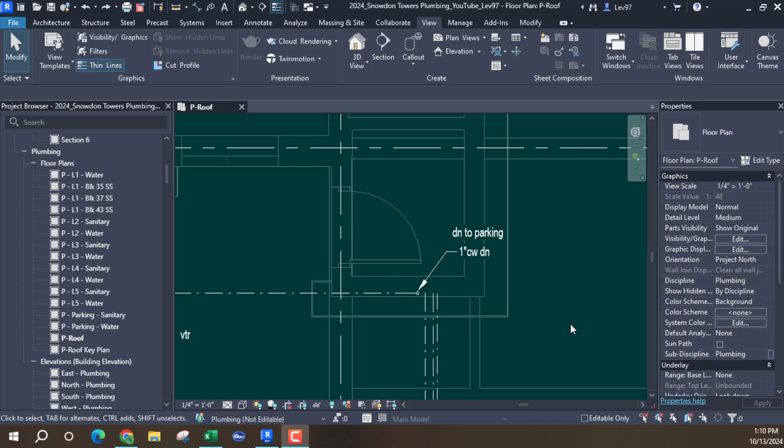Okay, let's continue with this project. And the last part of this project, I was doing the water services.

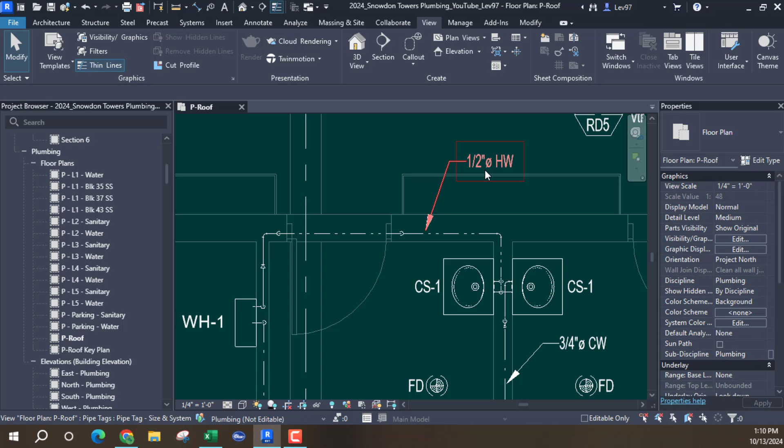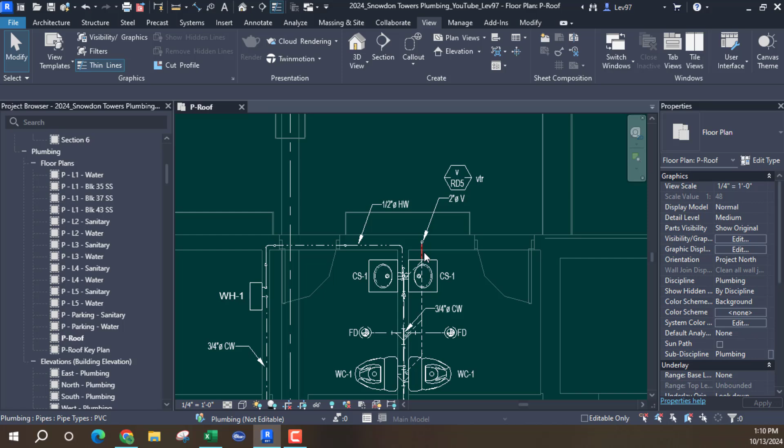So I finished with my hot water going over the door. So I'm going to turn on both systems. Let me go to visibility and filter, because I filtered it out, and turn on my vent system and my sanitary system. As you can see, if I was going to print this out on a PDF, those two systems are being combined.

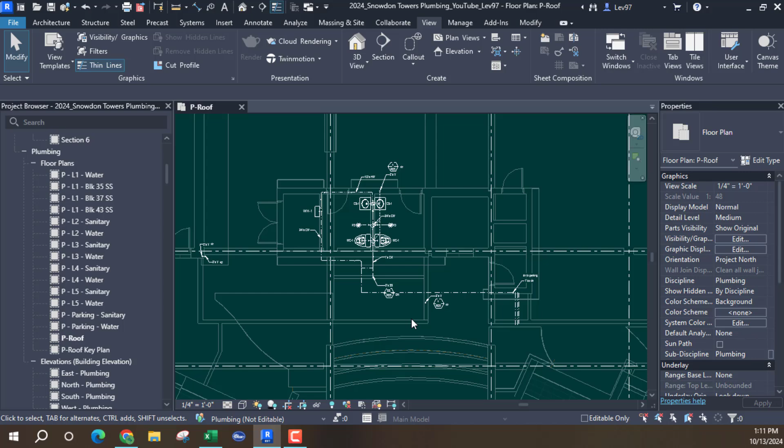And that's not a good idea, because what I've done is separated these through the levels. There's water on level 2, sanitary on level 2, sanitary on level 3, and there's a water plan on level 3 also. So what I'm going to need to do is separate these two systems, the water from the sanitary, because it just doesn't look

readable. In this case, you could read it, you know, if you were looking at it, it's possible to read, but I think it can be more clear if we separate them out.

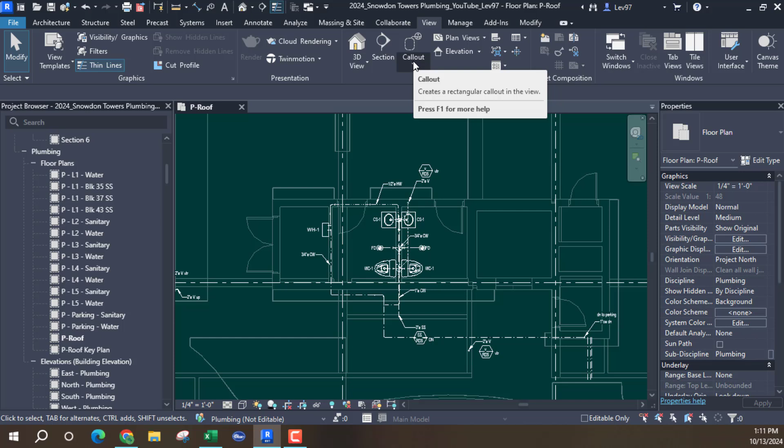And the way to do that is to use what's called a callout. Let's see what it says. A callout creates a rectangular callout in the view. But it does a little more than that - it allows you to filter out information.

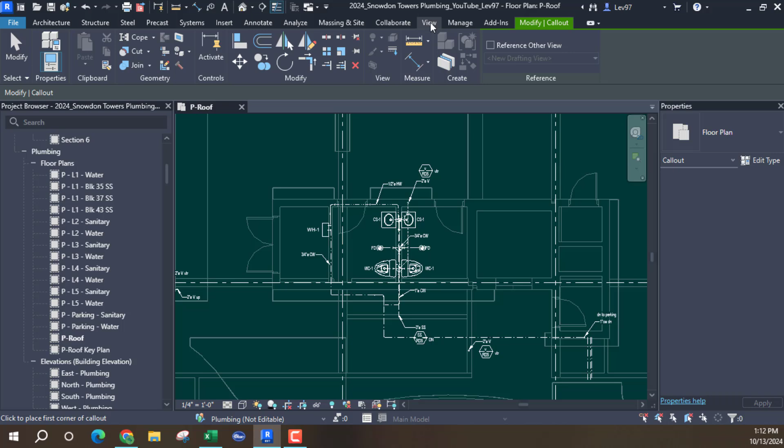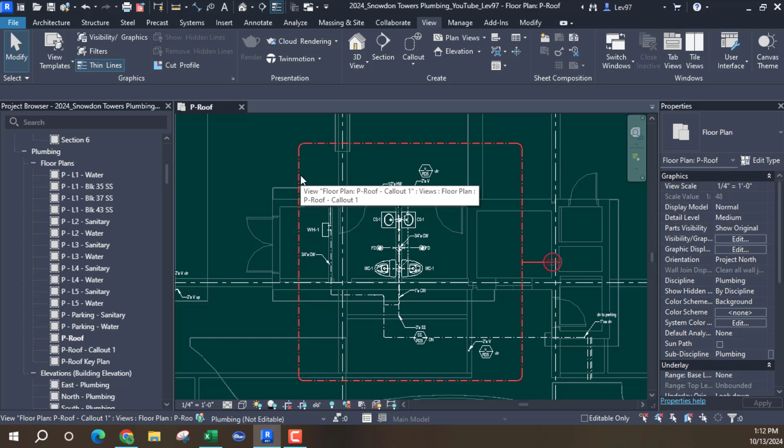So let's see what this says. I'm already in the mode, so let's go here and I'm just going to click. And what it's done is created a callout here. I'm on the roof plan, but it created callout 1. If I hover over this triangle, it's going to say callout 1. So I'm going to go to this roof plan, double click, and it's showing me information.

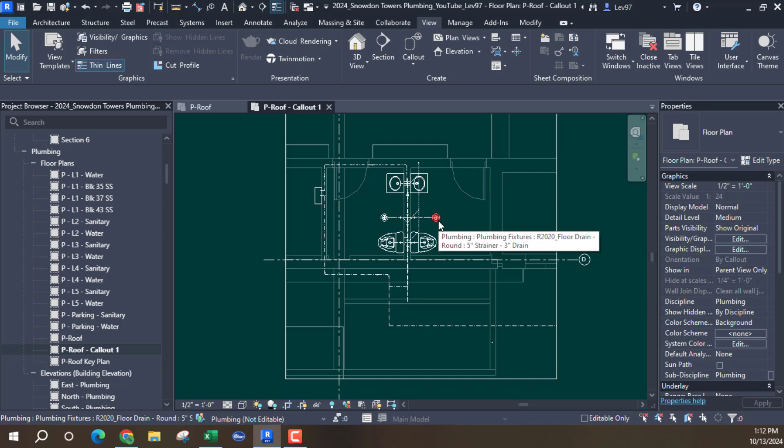Okay, it has the grids, and it has both systems. And you can see that it's giving me a way to separate the two systems.

And the way I can do that, first I think I'll put this on a 1/4 inch scale. What's my roof on? My roof is on a 1/4 inch now. Can I put this on a 1/4 inch? I'm sure I can, because it was just on the half, right? So that's still a 1/4 inch. You see, so now it's independent of my roof plan - it's independent now, so I can do whatever I want to do.

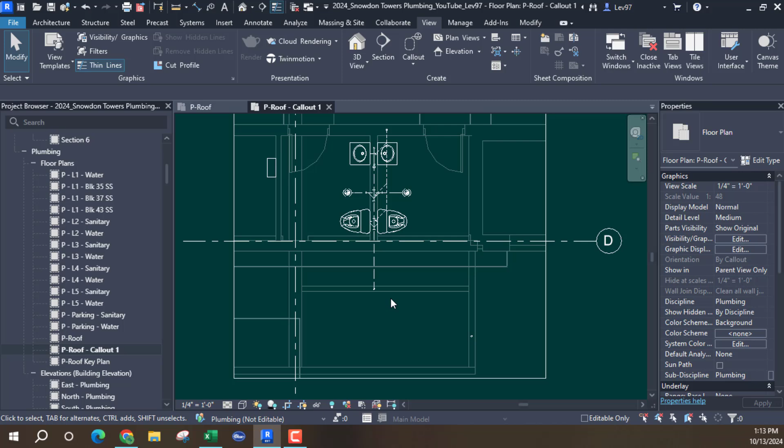I'm going to continue using the 1/4 inch, and I'm going to turn off - it can either be the water, let's see what comes first. I think sanitary is going to come first, so I'll turn off the cold and hot water. And we can say OK. So now this is a sanitary system.

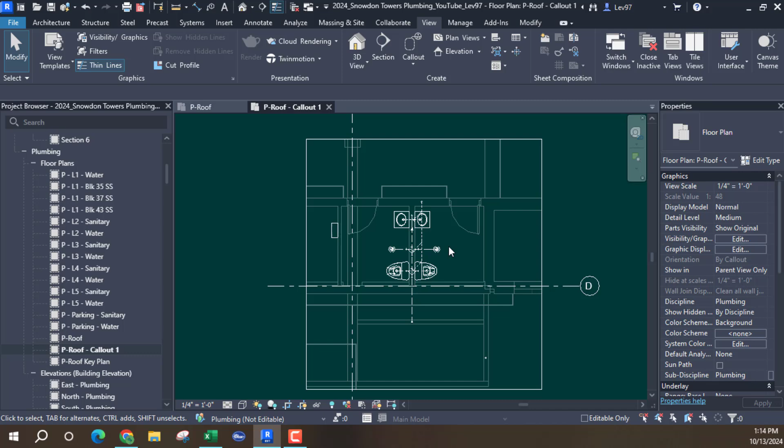So what it's done, what I see, and I think you guys can see it too, is that the text did not transfer over. So let's see. I think that first, P-roof callout, I'm going to rename - let's call it callout sanitary. I'll keep the callout name, or you can do whatever your office standard is, but for my purposes, I'm going to say callout SS.

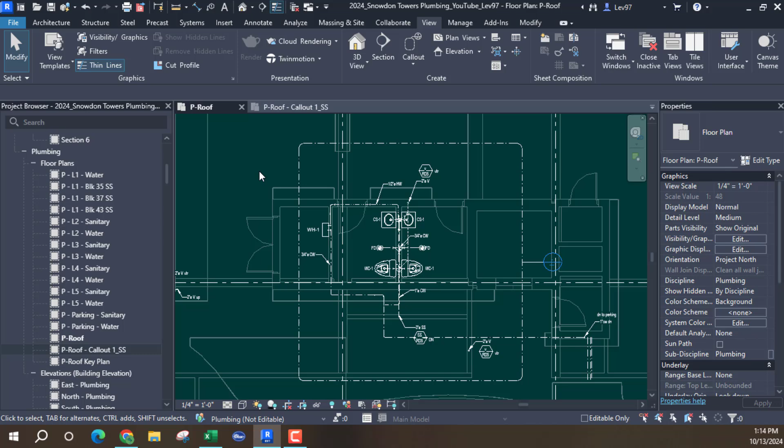Let's go back to the roof plan and do another callout. Let's see, can I copy or duplicate? Okay, I don't think it's going to do that. Let's see. Well, I'm going to do it again. There might be a way to...

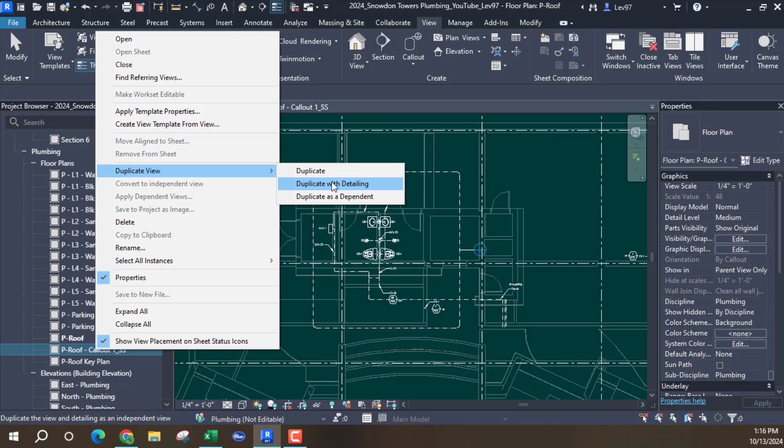Let's do another - let me... So what I'm going to do, let's see, I think let's go here and right click and duplicate view. So if I duplicate view with detailing, will that bring over the text? Nope. But okay, so I can use this.

Let's rename this, and let's call this water. That's a copy - let's call this water.

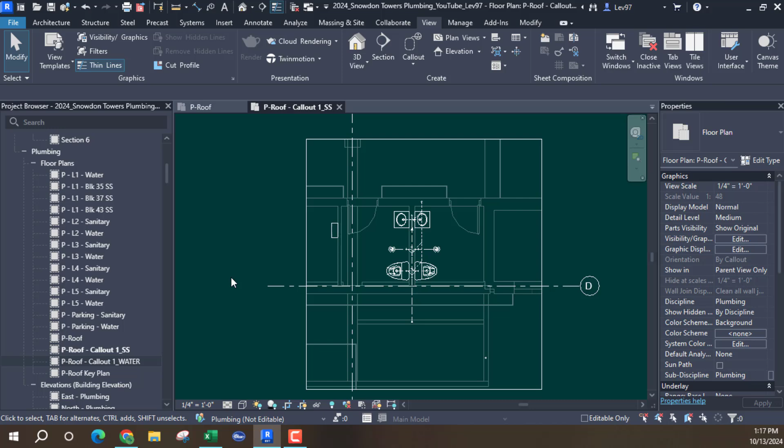Now, if I want to put this on a sheet, okay wait, let's go over and filter out the drainage. So I'm going to turn off the drainage and only show - let's see what happens - if it's a duplicate, then let's see what happens. So this, wait, wait a minute, I did something wrong.

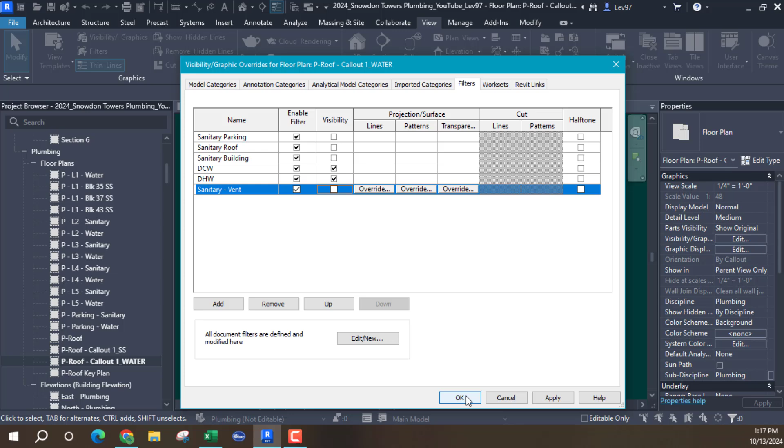Let's go back. Water, this is sanitary, water, here, okay. So let's go here, sanitary. I think that this might work, guys. This might work. Come on. Okay, so if I go back, only what I want to see is just sanitary - I don't want to see hot and cold water, right?

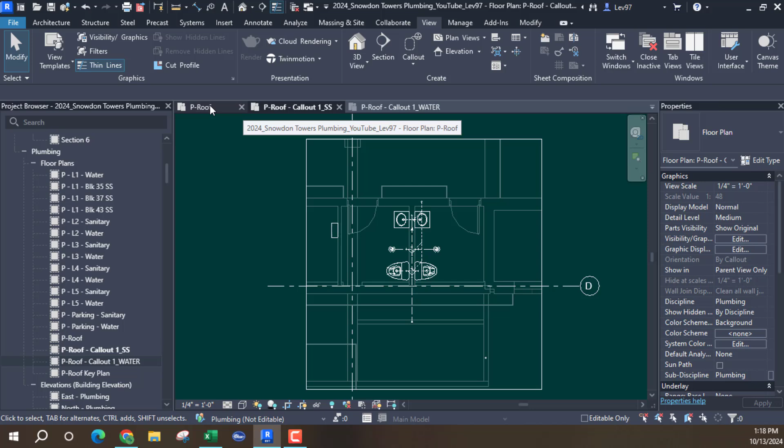So let's see what kind of magic is going to happen. Okay, that's what I want. Now let's go back to the roof, because this is telling me something, so let's go here, because I know what I'm going to do. I'm going to put this on a sheet, okay?

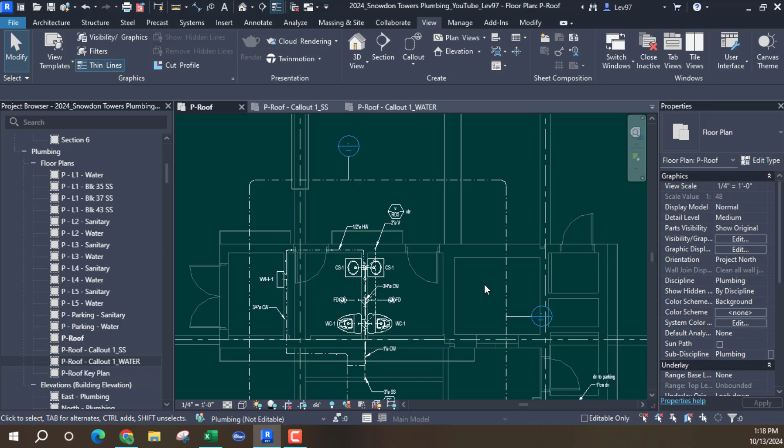Let's see what Revit does. Oh, okay, so there's two of them. You see? There's two of them. They're overlapping, which is good, because it looks like there's only one.

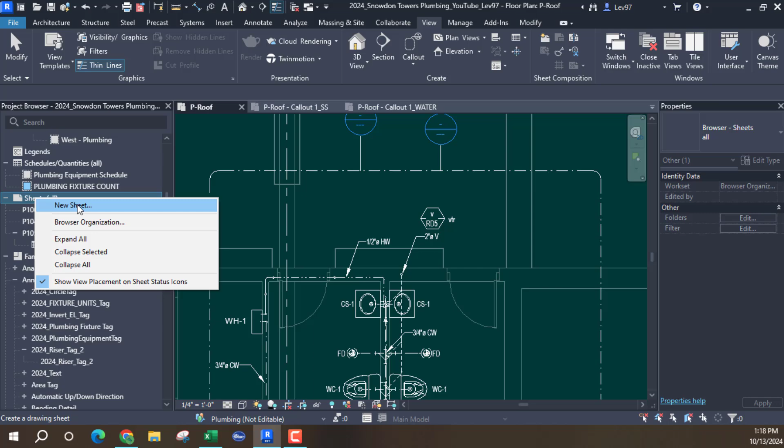So what's going to happen is, let's put these on a sheet. These sheets, level, let's go sheet. I'm going to right click, new sheet, and call it roof. Okay, this is my sheet.

I'm gonna say, okay, yours is gonna look different than mine, but it's the same process, okay? Same process. I'm getting there in a Pinto, and you might get there in a Cadillac, but we're all going to get there at the same place, right? So it's unnamed.

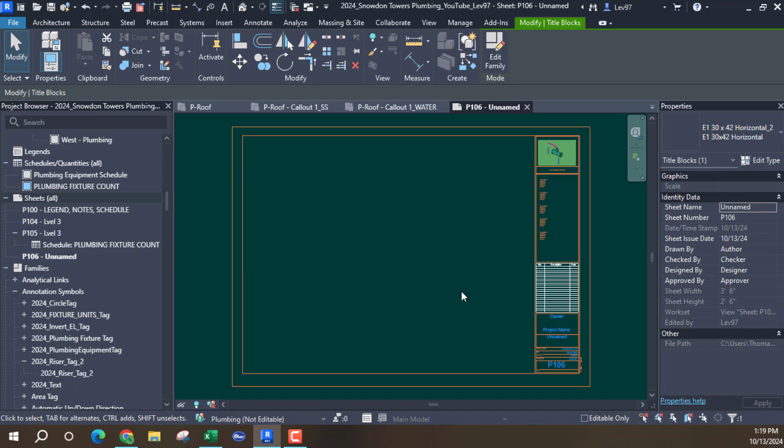Let's click this. Let's click here. I can go down. Sheet name is going to be unnamed. Let's call it roof plan.

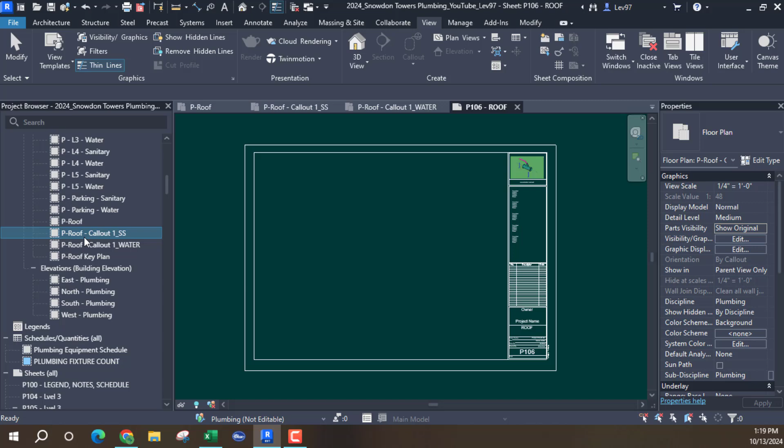And let's go back. Let's go to our callouts. So I'm going to drag both of these guys over. That's sanitary. So you can just drag these over and put them on your sheet. Really nice. Line them up however your office does it.

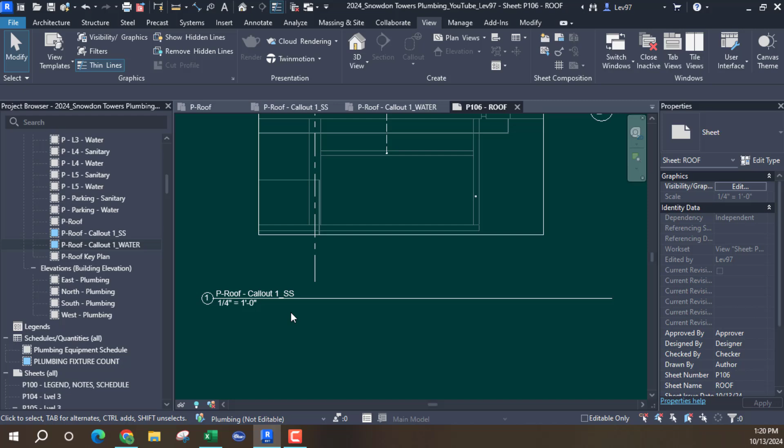Okay, so this is what's going on. That's the scale, that's the title. And this should be 2 over here, and then on our floor plan it should say 1 and 2, right? So you see, Revit is nice, ain't it? Man, how could we live without Revit? That's nice, I like that.

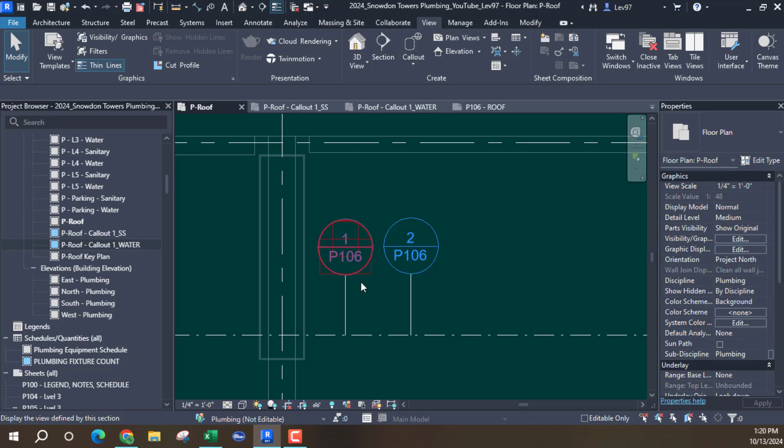The only thing about it is, I wonder if there's a way to manipulate these callouts where the 1 is going to say sanitary and 2 will say water. Somehow there should be a way to edit this family so that it can say water and sanitary. But maybe I can look into that and see if there's a way to do that.

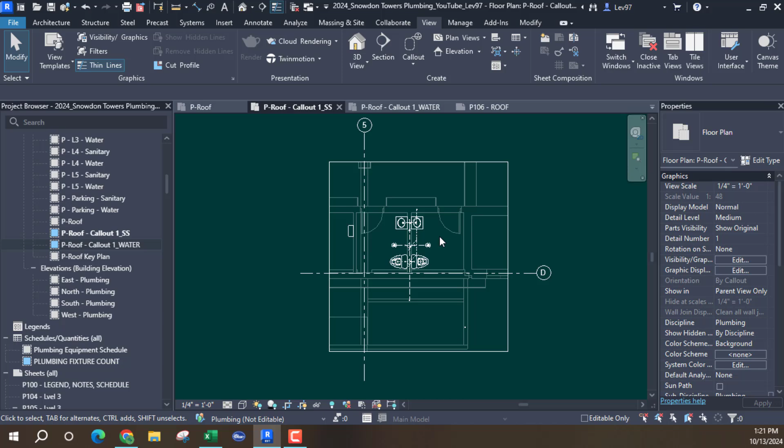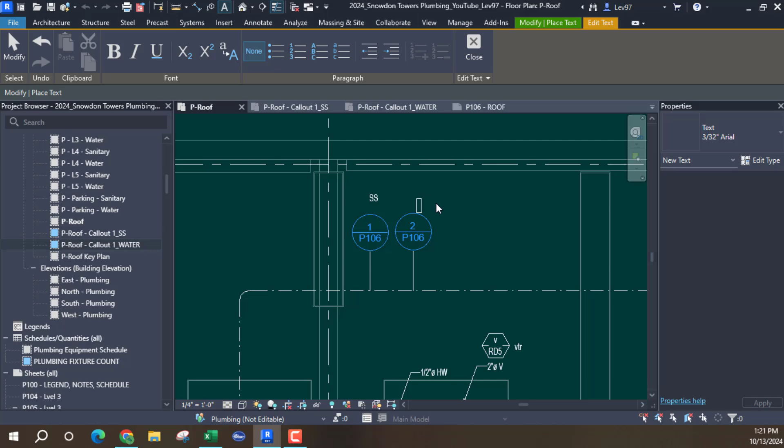Where am I? I'm here. So sanitary, SS. So for now, I think maybe I'll just put a text up and notate text and I'll just say SS here, and it's water. Okay, I know this is what we call dumb text. There's got to be a way to incorporate that into this family.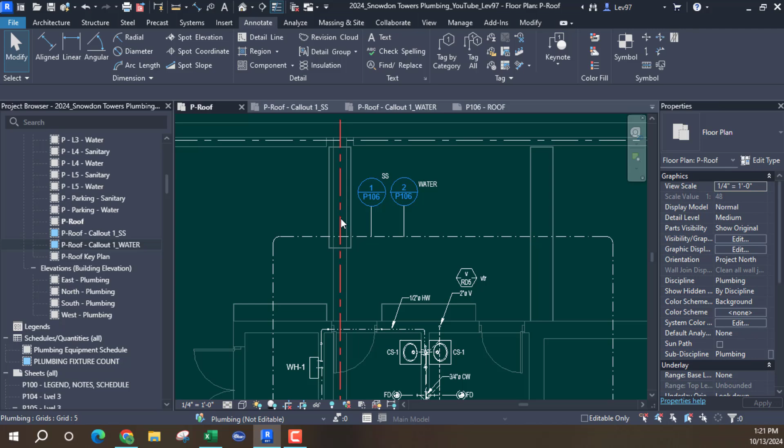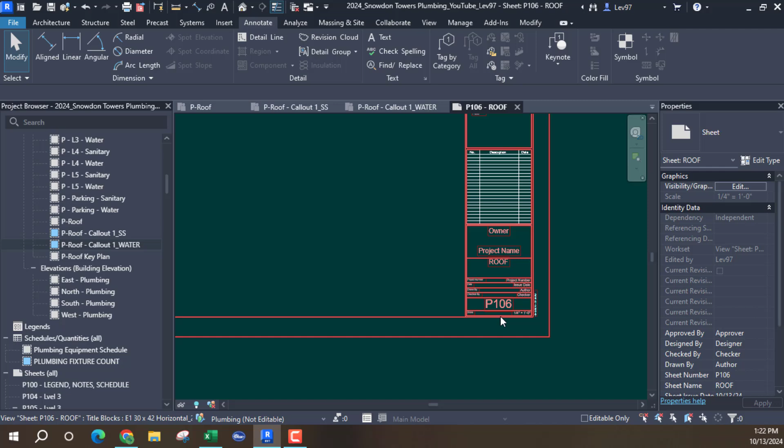So I'm not going to look at that now. What I wanted to do was go over how we can separate these two. Okay, but for now, whoever's reading this drawing, they know that it's the second view on sheet P106. So we go P106, and the number is down here, okay, and it's here.

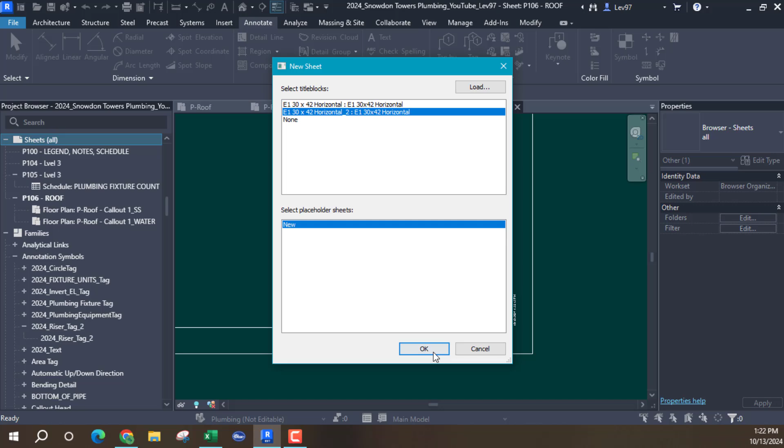I think we can change that, yeah, to whatever. You can change it to whatever, but what Revit does, it looks at the next number, you see. It brings in the next number. So if I right-click on sheets, the next number is going to be 107. Right-click, new sheet, it's going to be 107. Okay, that's just how Revit does it.

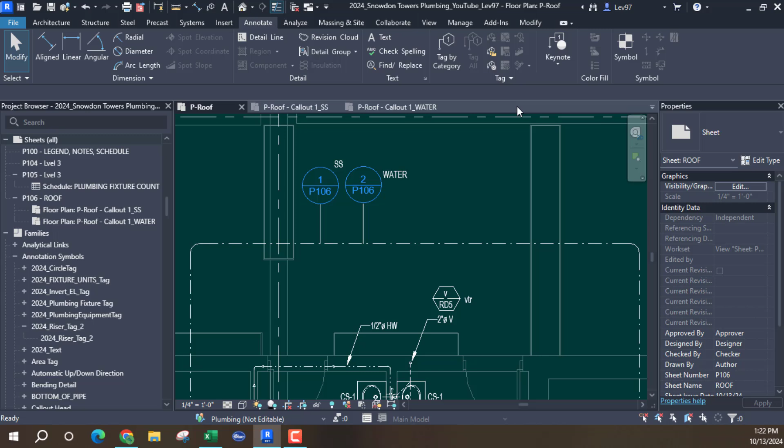So I'm gonna undo that, come back. Let me synchronize this before I do anything else. So I think that I'm gonna close this sheet out. I'm gonna close what I want to go over.

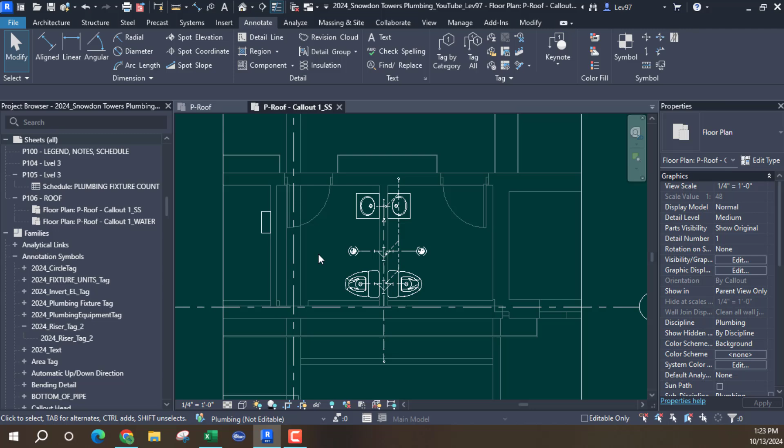I want to bring over my text. So let's close out. I don't like to have too many tabs open. Let's close that out and go to the roof plan. And I'm gonna try something.

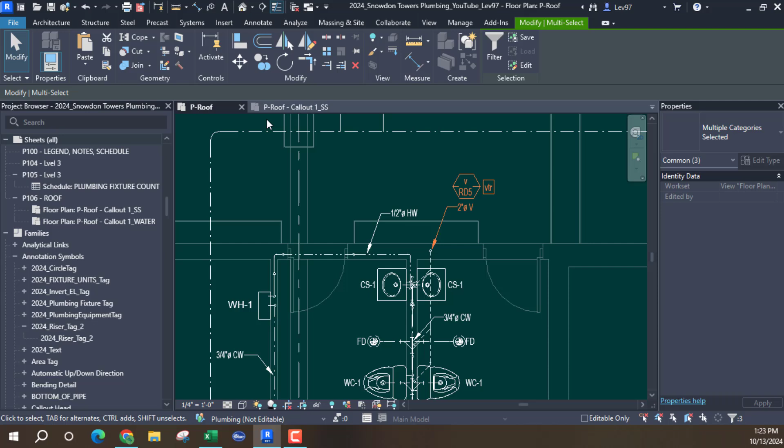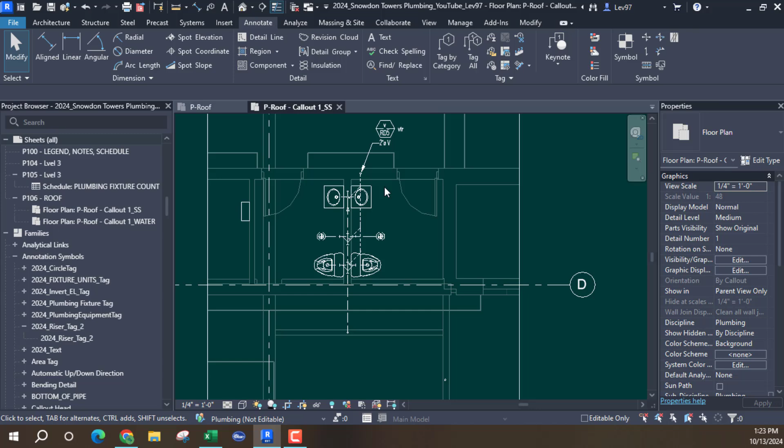Let's go here, and I'm gonna copy this to my clipboard. Copy to clipboard. Go to my callout, SS, and paste. Let's see, paste align to current view. Align to current view. Yes. Man, Revit is just full of surprises today.

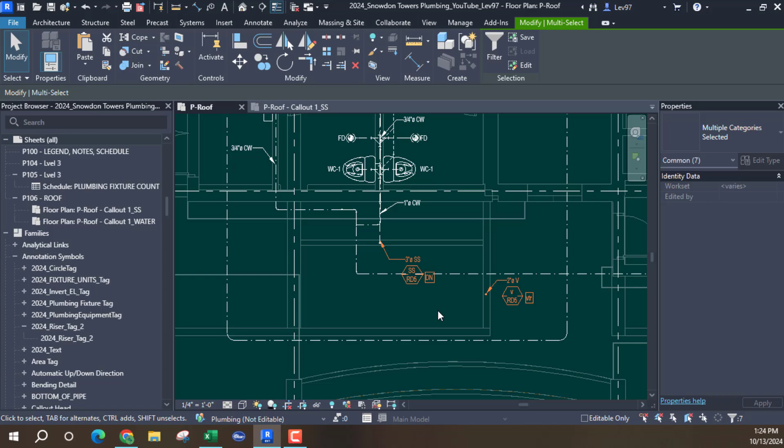Full of surprises. Let's go back, and let's just get a few of these. Man, there's not many. Let's go here, let's get this guy. This one, this one. Did I get that? Is it? Yeah, it's here. Okay, let's go back, I think that's all of the notes.

I mean, there's going to be more notes depending on your office, whatever your project manager wants you to put on. And maybe there's another way of creating your callout as well, along with the notes. Maybe there's a way to do that, but for now, I'm going to use copy and paste.

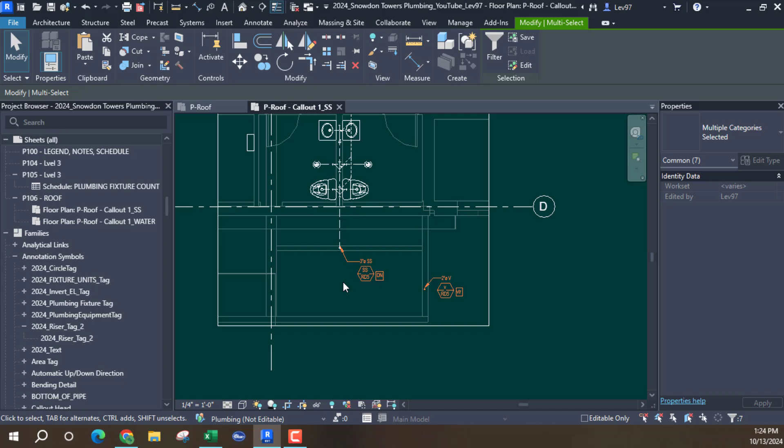Copy and paste to current view. So everything looks good. And you can go back and you can erase these two, or you can erase all of this information, which is usually what happens when you do a call out, right?

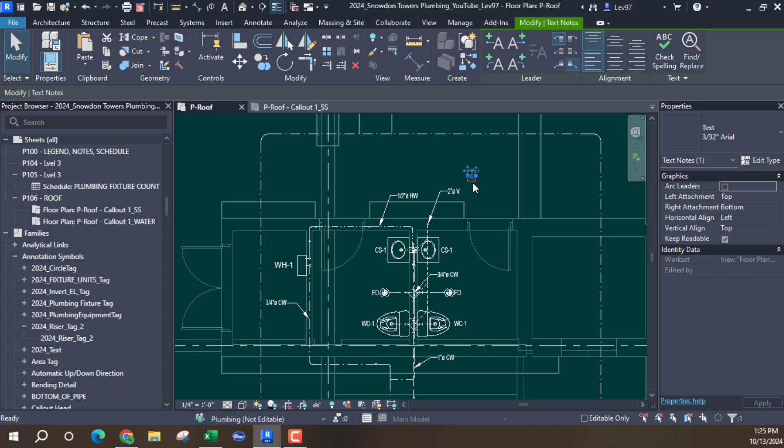You try to make it what we call a skeleton layout, right? So this would be, I would not have this text in here. So it would be more like, I don't want to erase it. I don't know why I'm paranoid about the fact that I just erased these two, these three, these four, these five, these six. You see, so it gets down to, no, let's leave them there.

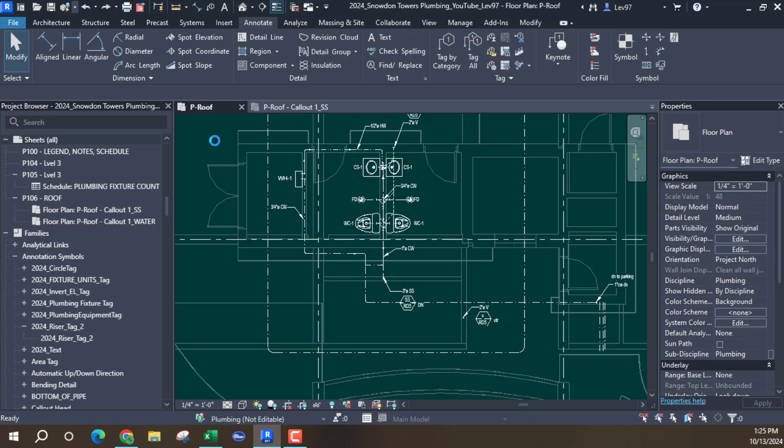I think it's okay, but depending on how your office is, me, I'm a little nervous about erasing those. I'm going to sync again, and I'm nervous for good reason. Okay, so we have that, and here's the second and first views on your sheet.

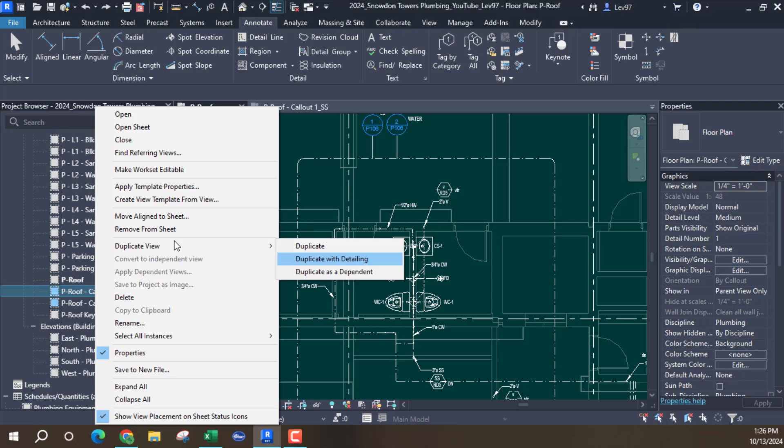This is the call out, which you can see that Revit created two, but you have to go in after you create the first one. You go in and you duplicate. Go here, come over here, duplicate. Okay, I tried duplicating with details, but that didn't work.

I thought duplicating with details would bring over my text. I am surprised that... I'm going to try this again. But just view, call out.

Rectangle, let's do this one. And it's going to be this call out. Double click. Okay, it's this guy. You see the text is not there. Let's go back.

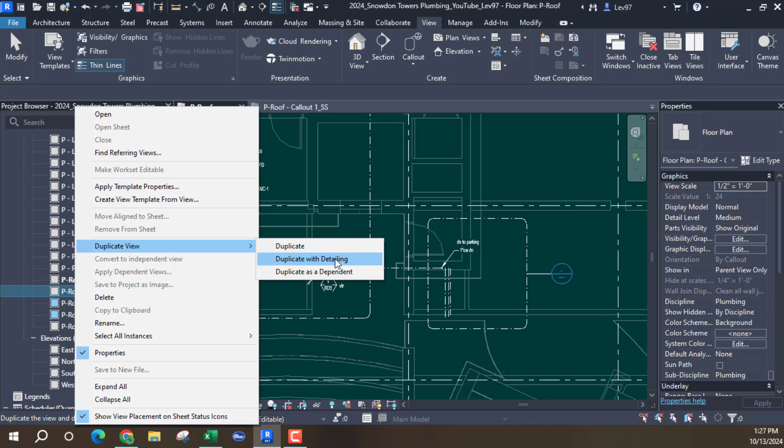I'm going to, but I will be duplicating with detail. Then I could, let's see what happens. Now I can erase the other one. Nope, it's not happening. So, okay, so I'm going to erase this. That was a test to see what's going on. That's fine. And erase, nope. Delete this one, delete that one.

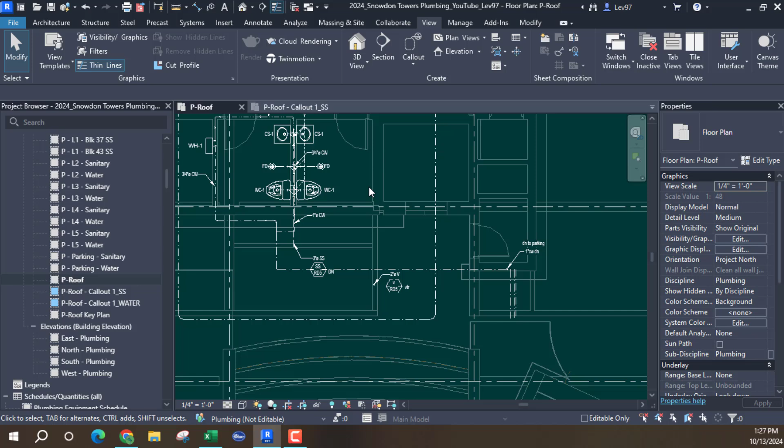Okay, so that's what's going on with the call out. And the reason is because there's two systems just overlapping each other, and it doesn't look pretty, right? It just doesn't look pretty at all.

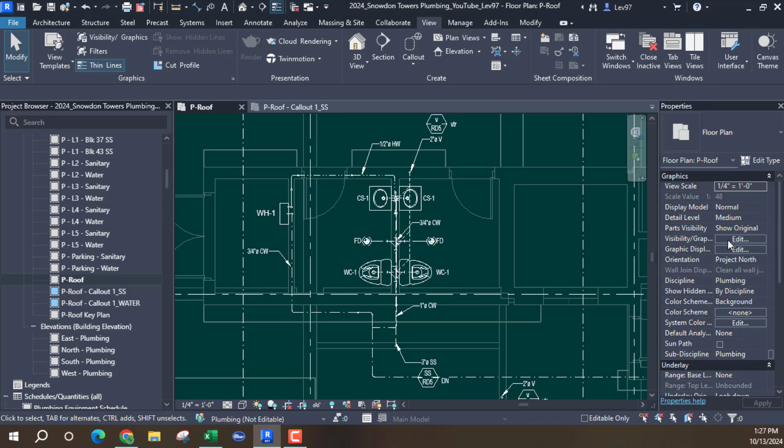So that's the reason, and what we can do is, can we filter? Let's filter. Let's filter, and we can do it like this, we can do it like this, and we can do that. Okay, so we have this.

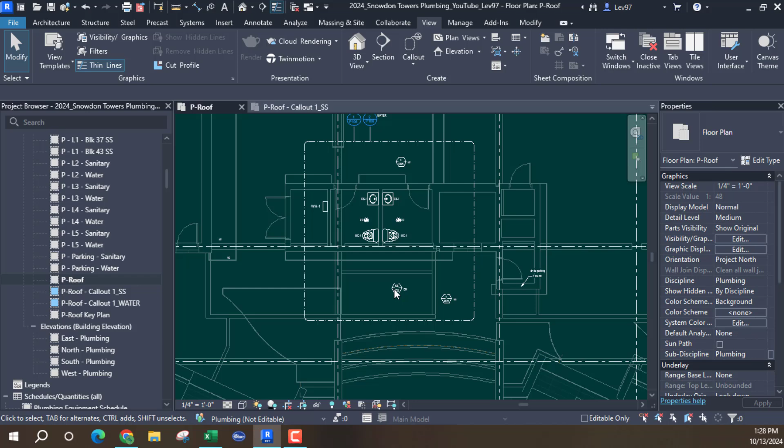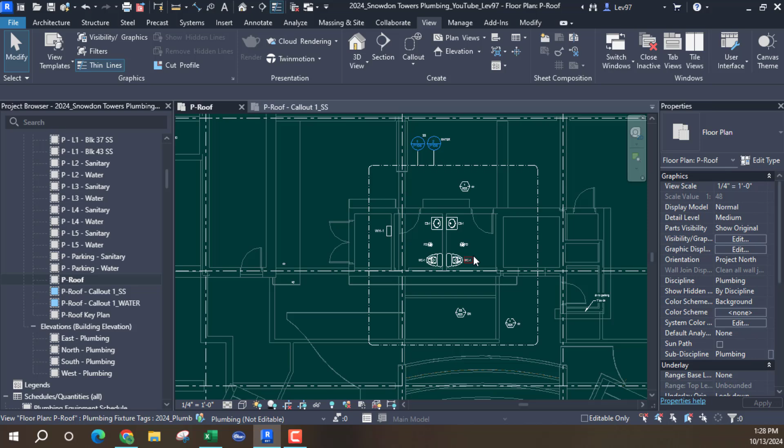And we can take off or delete this text. We can delete this text, and we can use this reference so that someone would know that on the sheet we can see what's going on in this skeleton, right? The skeleton floor plan. So they will click on here, or they can go to the sheet. They can go to the roof plan, and it's here. Okay, so everything is still there, but you don't have a lot of clutter.

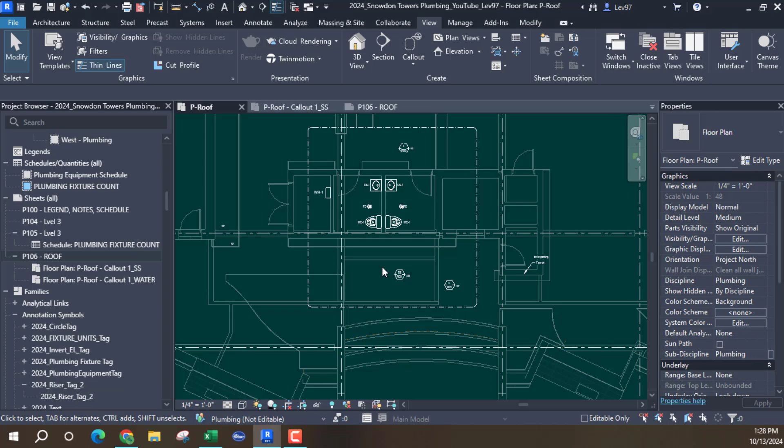And you can tell the contractor or whoever's reading this drawing, your project manager or whoever, can know that this is the reference that they can go to see what's going on within this parameter, or this floor plan.

Okay, all right, I think I'm going to leave it like this, and you can delete your text. I left it there, or what you can do before you even make the text, you can go to each of your systems and create your text within your call out. I think that might be a call out.

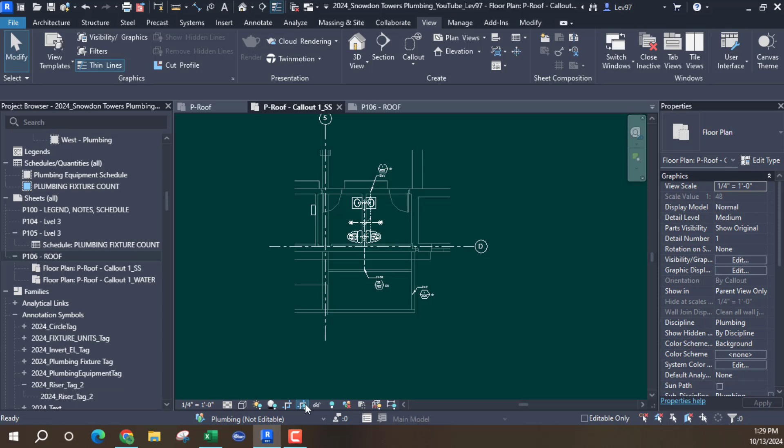What's that? Is that crop view, hide crop region? Okay, so that's what that is. So that's the crop region that was being shown. Okay, so that's what's going on. So it's up to you guys how you want to do it.

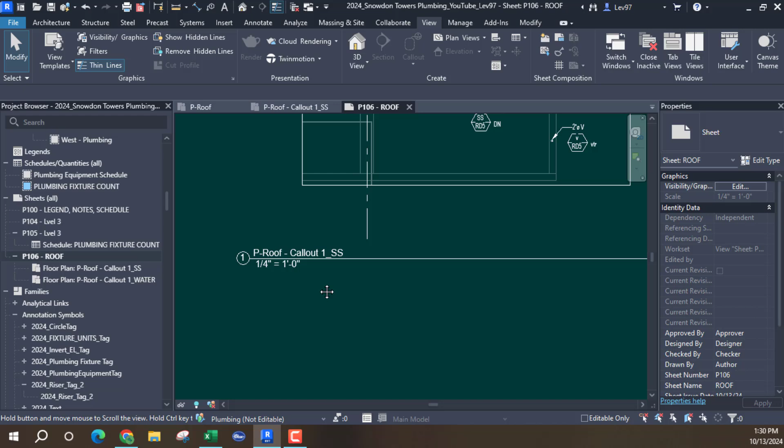I just wanted to point out that once the system starts to overlap, you can always separate your systems using a call out, and from there you can put your call out on a sheet, and you can call it whatever you want to call it. Okay, here's your viewport, and you can edit it however you want to edit.

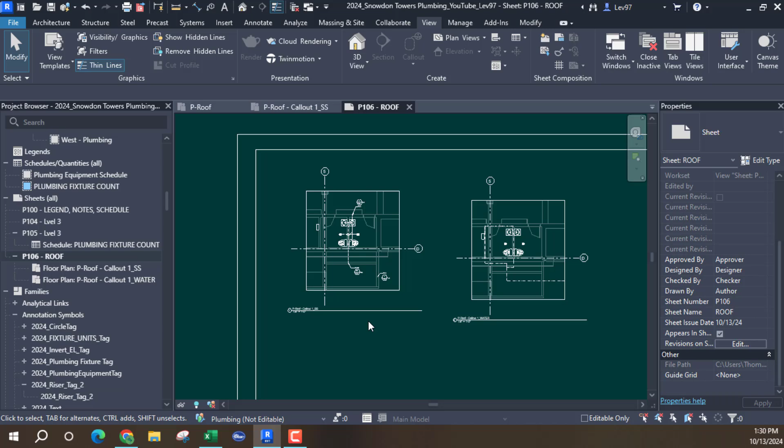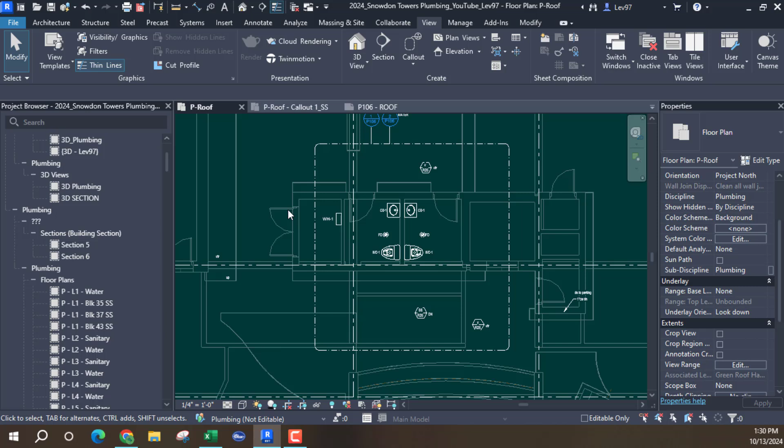Let me go back. Okay, so I think you can change, you can have to change the name in your project browser. Okay, so there's a lot to do within a project, and that's one of the ways that you can have your drawings read without confusion. Okay guys, I hope that helped, and I will talk to you guys later.